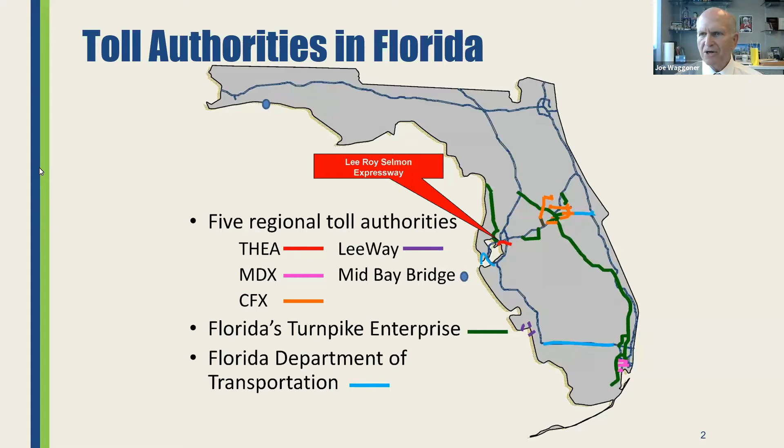In Florida, you have a number of regional authorities who build, maintain, and operate toll facilities. You see some of them listed here: THEA for the Tampa Bay area, MDX down in Miami, CFX is Central Florida headquartered in Orlando, shown in orange. You have Leeway, down in Lee County, and Mid-Bay Bridge Authority up in the Panhandle, shown with a blue dot. They have a bridge facility that they built and maintain.

You also have the biggest players, the Florida Turnpike Enterprise and Florida DOT. Believe it or not, DOT and the Turnpike each own their own toll facilities, while the Turnpike actually does the toll collections for DOT-owned facilities. They actually own toll facilities separate from the Turnpike.

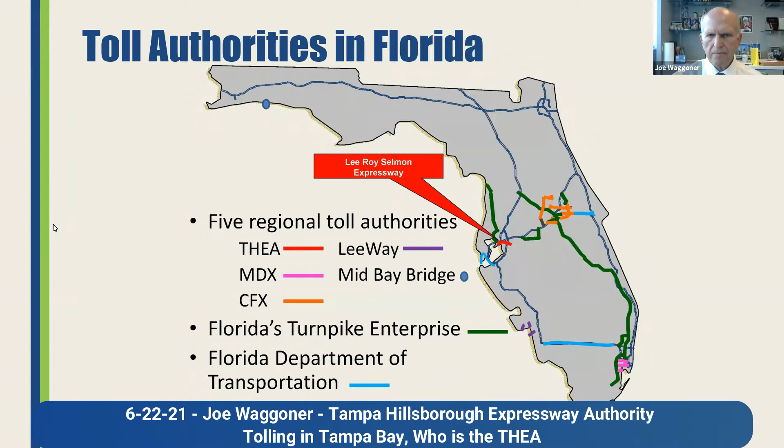Here in Tampa Bay, you see us, Lee Roy Selmon, down there in the red. Here in Tampa Bay, you have three players. You have the DOT, which owns the Skyway Bridge to the south. They also own the Pinellas Bayway bridges, which we didn't highlight here. You have the FTE, which I mentioned when we first introduced ourselves, which owns the Veterans Expressway and the Suncoast, which goes north further. And they also own and operate the I-4 connector.

On the Skyway Bridge, the Turnpike does the toll collection there for DOT as well. But THEA owns and operates the Lee Roy Selmon Expressway. And I'll talk a little bit about what THEA is next.

THEA is the Tampa Hillsborough Expressway Authority, created under state statute. So we say we're an agency of the state because we're created under statute. We receive no tax funding. Like a business, our revenues come from user fees paid by our customers. Our projects are financed using cash and bonds backed by those toll revenues. And the key difference between us and the Turnpike and DOT is that all the tolls paid on our facility stay in Hillsborough County to maintain, operate, and build other toll facilities.

We're also governed by a local board. I don't report to the county, I don't report to the state, I don't report to the city. I have a board of 7 members who we report to and who authorize all of our work.

Our board members are 4 citizens of Hillsborough County appointed by the governor. Right now that's Mr. Vince Cassidy, Mr. Danny Alvarez, Bennett Barrow, and John Weatherford. We also have 2 elected officials: Mayor Jane Castor sits on our board, and one of the county commissioners they picked to sit on our board, currently Ken Hagan. We also have District 7 Secretary David Gwynn as the 7th member of my board, and they're the ones who oversee and administer the agency.

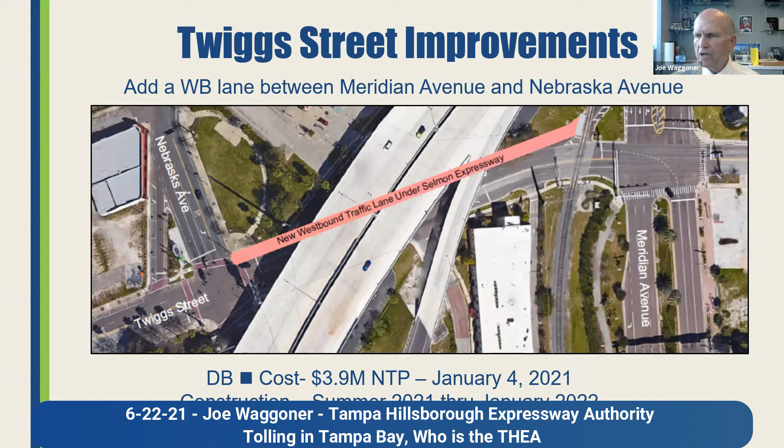In hand with that, on Nebraska Avenue, which you see there, we have another project in PD&E, highlighting that area where we want to carry traffic around Twiggs Street and up to Nebraska to further relieve congestion on Twiggs Street down in the area of the courthouse.

That project is in the planning stage right now. It's a $14 million project that will, again, reduce congestion on Twiggs Street, helping traffic move up to Cass Street for the morning commutes and evening commutes in and out of downtown Tampa.

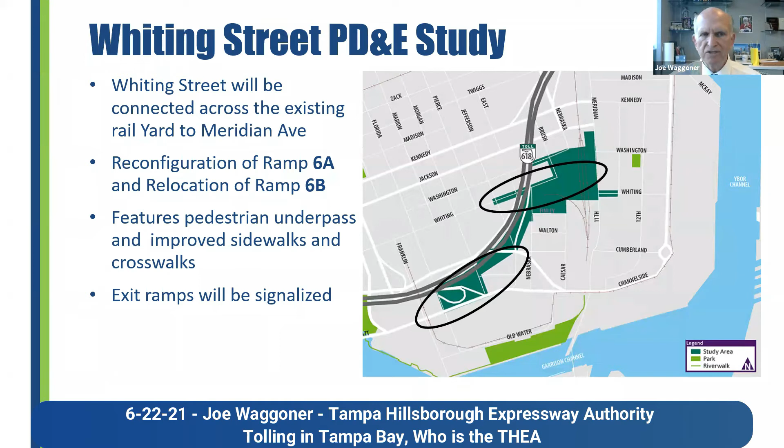We're also going to do another significant improvement as part of this project, which is that bottom circle, highlighting our downtown eastbound exit ramps. We're going to do some significant improvements on that to spread out some of the traffic and improve the flow there. I'll highlight first on that ramp construction area, in the bottom left slide. You see, back in the shadow there, some roadways that have X's through them.

And the ramp that currently brings you up to Florida is going to be elongated and made double and even triple lane to create greater storage. We're going to signalize where that ramp currently comes into Florida.

This is all to improve pedestrian and cycling safety needs. We're also going to build the right side of that elevated area so you create a pedestrian path that's green, going through the inside of the interchange, so people have easy access with pedestrians or bikes to get north and south through this area.

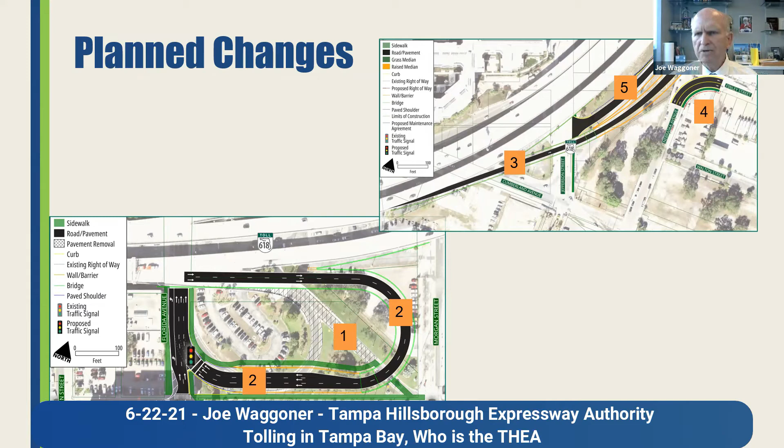There's a minor change to the existing ramp that I'm not going to waste time talking about right now, that would take you from Jefferson Street onto the Selmon Expressway going eastbound. So that's part of the project.

And now here's the Whiting Street component of the project. At Whiting Street, which exists right now up to and under the Selmon Expressway, you see these rail yards that I was talking about.

And as that Water Street development continues from south to north, and comes up into the area below Whiting Street, there's going to be an opportunity to create another connection to Whiting Street, again to enhance the city grid down there and enhance a lot of the pedestrian and bicycle needs.

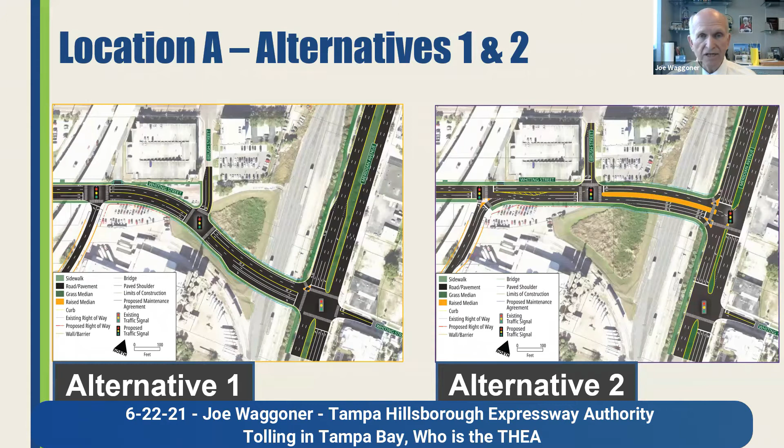The city wants to build a bike track on Cumberland, just to the south of these. By making this Whiting Street cut through, that will enhance the potential for them to do that, building a lot of the Vision Zero complementary elements for pedestrian and bike safety. That's part of everything we do now within our projects. So that's the Whiting Street project.

We actually accelerated a little piece of that—we want to build 2 new ramps for the reversible express lanes. I'm depending on you knowing something about the facility, and if you don't, it's just too hard to explain. But right now, the reversible express lanes run from Brandon to Twiggs Street, which I talked about, that western end earlier.

We want to create an earlier opportunity to get on the reversible express lanes in the morning, where you come around from I-75, that north-south road you see out there, to give you a chance to get on the REL sooner.

But more critically, the benefit there is it's going to free up a lot of capacity where you have a choke point where 301 comes on and off of the Selmon Expressway and on and off of the REL in the morning. We're going to create another exit ramp that doesn't exist today, out in the area of IKEA.

It's just to the west of the I-4 connector onto the Selmon.

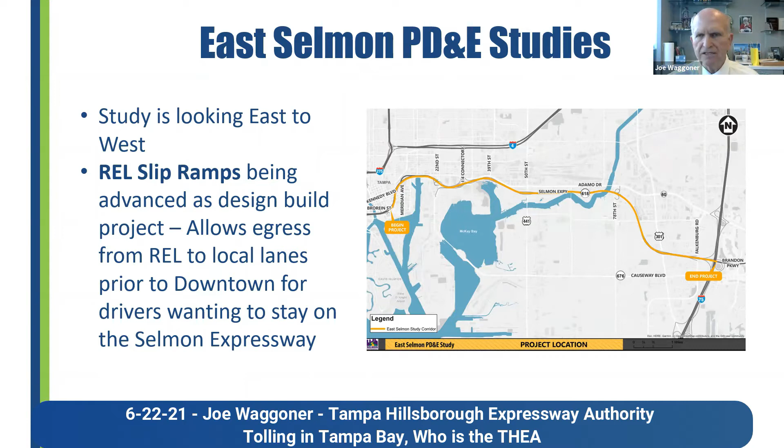So now I'll briefly go over the three big phases coming over the next 10 years for this. The blue line identifies a westbound lane we want to add and some more ramp work we're doing. That project, when we break it out, is estimated to be about $190 million to start in fiscal year or calendar year 2027.

The next phase we'd look at is actually the downtown segment, running from the I-4 connector to the west, both eastbound and westbound. We want to add another lane out there, and we also want to do ramp improvements to the Jefferson Street ramp and the Brorein Street ramps that are out there.

We need more capacity. The Water Street improvement alone is adding 1 million square feet of office and 1 million square feet of commercial in this section of the downtown corridor zone, and it's going to attract a lot of traffic along with the residential. I think they're putting in something like 4,000 to 5,000 residential units with that development, and they're not the only ones building in downtown Tampa. They just happen to be the biggest name out there.

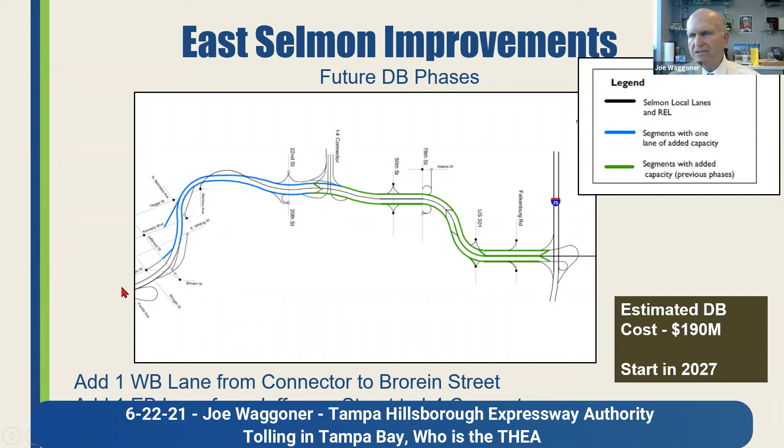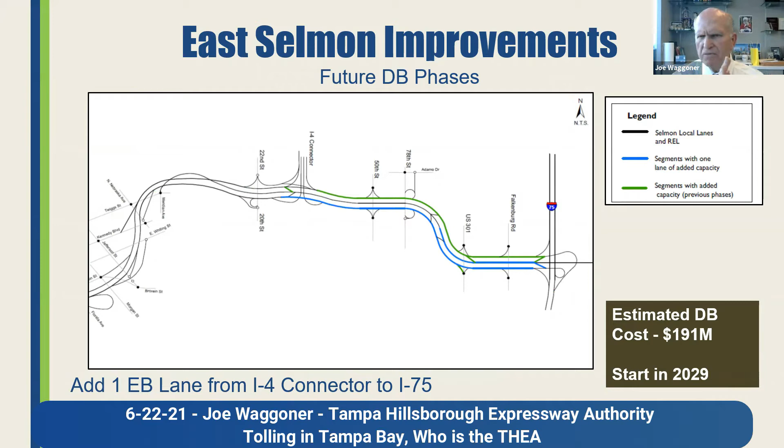The last segment will be going eastbound, because the REL works well for us out here. This is kind of the last segment we'll have to do on that part of the Selmon Expressway, and that's going to be about $191 million that we don't think we need to start until 2029. So that's the big work on that side of the Selmon.

When you go back on the west side of the Selmon, or we call it Selmon South, because even though it's an east-west running roadway, on this segment it kind of runs in a southerly, westerly direction, so we name it the South Selmon. That's what my engineers like. I think it confuses people a little bit because it's on the west side.

But here we currently have 4 lanes, 2 in each direction. We want to add, ultimately in the future, up to 8 lanes, but we can do that in phases. We don't need any more right-of-way; we have all the right-of-way we need. Our plan right now is to build 1 more lane in each direction and do that to the outside.

As a component of this, when we build those lanes, we would be doing noise walls along the entire length of this improvement. The noise analysis the engineers performed says you only need 1,200 feet - that's the only thing the noise analysis justifies. Well, we realize our customers have said they really want walls, they really want the barriers up there. So the agency's already committed that when we do the first 2 lanes of this ultimate improvement, we're going to build those noise walls as part of this, and it's part of the estimated cost we have for this project.

It currently sits at $270 million, and we hope to start this around fiscal year 2023, when we'd like to be putting this out for a design-build project. Again, we look at a lot of elements here to improve safety, and I can highlight some, especially at the interchanges.

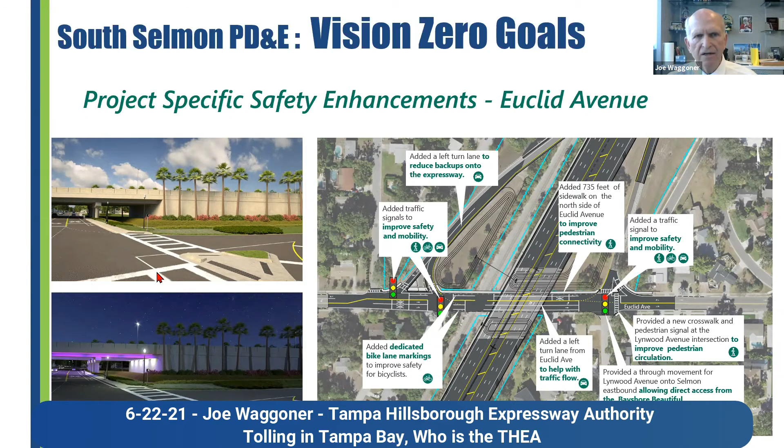As you can see in the bottom left picture, we again, as we always do, focus on the aesthetics - what's it going to look like. We will have landscaping, we will have aesthetic lighting out there. The same thing is true at our other significant interchange out there at Willow.

You have right now - it's hard for me to show, I wish my mouse would show on this thing - because I could show you the existing intersection at Cleveland Street. It shows a little bit.

The existing intersection at Cleveland Street just brings you down right with a feed into Cleveland. It's tough because that traffic is moving at speed on Cleveland. You have to come to a complete stop, especially in the morning and evening rush hours, to get onto Cleveland. Well, we're going to extend that down to the intersection and do a split intersection operation there. That's going to be much safer.

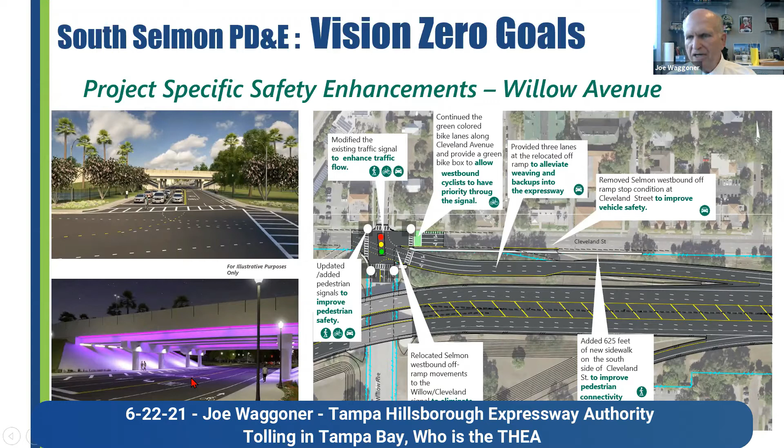That will also incorporate a signalized intersection with pedestrian and bikeways along there. And here again, there's another 600 feet of new pedestrian sidewalks that doesn't exist. And again, the landscaping and lighting is going to be a key element that we'll commit to as part of this project.

By making these improvements, we foresee significant reductions in projected crashes and injuries. It's all about being safer, smarter, and greener. By reducing congestion or keeping congestion under control, you greatly reduce carbon emissions and the negative effects to our environment. And it's a safer and more reliable trip for our customers. And that's what it's about.

And keeping traffic out of the local communities and keeping them on the expressway. Because if you don't do these kind of improvements, they're going to go back. And if they're sitting in traffic congestion on the Selmon Expressway, they're going to get off the expressway and they're going to try and weave their way through all the local streets to get to where they want to go. So we want to give them a better option, is the intent here.

So, I've talked about the major traditional type improvements that we can do. I want to talk just a little about what else can you do. What's big in the future? What's coming our way? We see a lot of opportunity with automation that's happening out there in the world.

Virtual office - COVID has delivered a very strong and new message to our business community. One of the best ways to reduce congestion or address congestion is don't make the trip. If you can work from home via a virtual office, then that's a valid way to improve your transportation system by reducing the demand on your transportation systems. And that's going to benefit everybody in the business, whether it's a roadway or a transit asset. Having that as an option is a great option to have going forward.